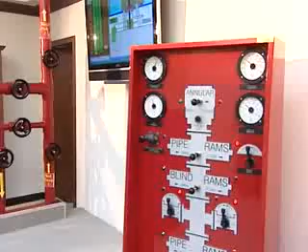Welcome to the ADC Simulator, where we make the effort to simulate well control situations which occur on the rig as realistically as possible. In the following few minutes, you will see an enactment of a well control operation and the complications that might arise during this operation.

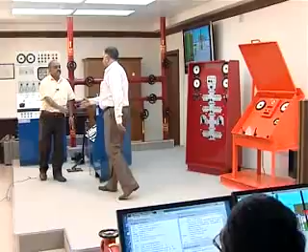Hello, boss. Hello, driller. How are you? Fine, thank you. Hope you had a good rest. Yeah, I'm excellent, in good shape.

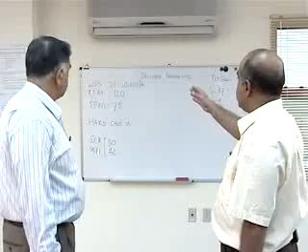Very good. So today we'll be drilling. Okay. And while drilling, these are the parameters you have to keep. Weight on bit will be 25 to 30,000 pounds. Okay. RPM 120. Okay. SPM will be 75. So before you start, driller, make sure all your lineup is okay. Okay. On the rig floor and also on the choke manifold. Send your assistant driller and make sure the lineup is okay.

Check your alarms, and we are entering the pay zone now. Right. So you have to be very careful. Okay. Make sure you set all your alarms. Okay. And if there is any drilling break, please make a flow check. Okay. And if it's flowing, then we will use the hard shut-in method. Sure, sure. Okay? Okay.

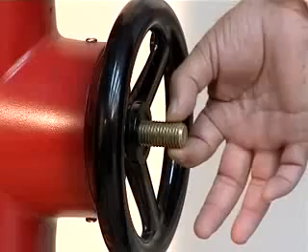I will check the standpipe manifold for correct lineup. Both mud pump number 2 and mud pump number 1 should be lined up. Standpipe number 1, the valve is in open position if the spindle is extended out, and if the valve is in closed position, the spindle will be inside. The valve going to standpipe number 2 is in closed position.

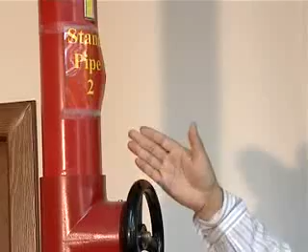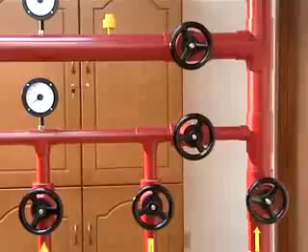This isolation valve in the middle is in open position. Both of these valves are leading to standpipe number 1, which is also in open position. The line coming out from mud pump number 1 is in open position. So both of the mud pumps, mud pump number 2 and mud pump number 1, are lined up to standpipe number 1. All valves on auxiliary lines should be in closed position. Closed, closed, closed, and closed.

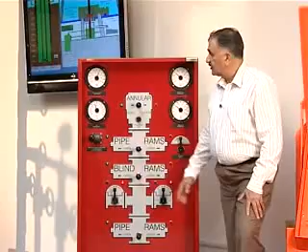Now I am checking the BOP remote panel. Accumulator pressure 3000 psi, air pressure 120 psi, manifold pressure 1500 psi, annular pressure 1500 psi. Green light indicates that the annular is in open position. Green light, upper pipe rams in open position. Green light, blind rams in open position.

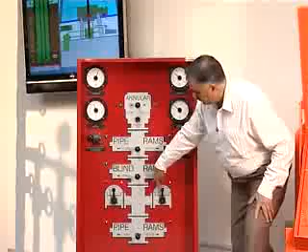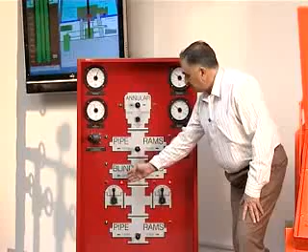Red light, kill line in closed position. Red light, choke line in closed position. Green light, lower pipe rams, which are the master pipe rams, are in open position. So all BOPs are in open position. Both kill line and choke line are in closed position.

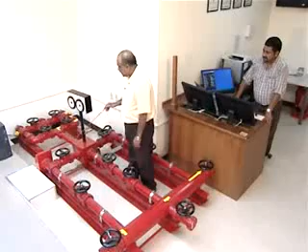As we will be using the hard shut-in method, this is the way we are going to line up the choke manifold. This is the line coming from the BOP and into the block of the choke manifold. From the block of the choke manifold, on this side we have the remote choke, which will be in the closed position, and on this side we have the manual choke, which is also in the closed position. The path the mud will take will be from the block through this open upstream valve, remote choke closed, valve downstream open, and out into the mud gas separator.

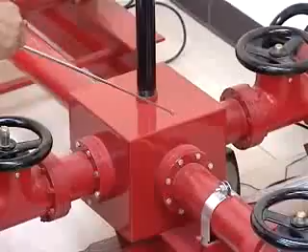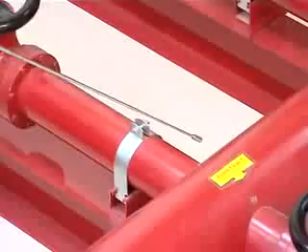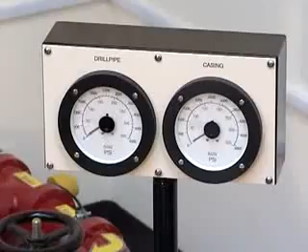From the block there is also the bypass line with two valves on this line, both of which are in closed position, which is connected to the buffer line through which it goes to the flare line. This valve upstream of the manual choke is in closed position, the manual choke closed position, the valve downstream of the manual choke also in closed position, and this line also joins the buffer line. These are the gauges mounted on the choke manifold, one for drill pipe pressure and one for casing pressure.

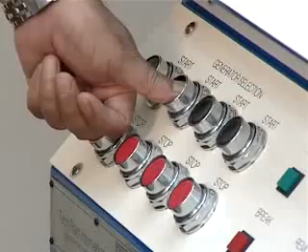To start the engines, press this button. To start the second engine, press this button. Put the mud pump 1 on, and before I go ahead to drill, I will take the slow circulation rate. Bring the mud pump to 30 strokes, and I will read the pressure from the remote choke panel. Slow circulation rate at 30 SPM, 650 psi.

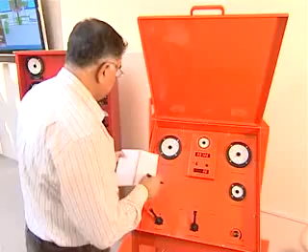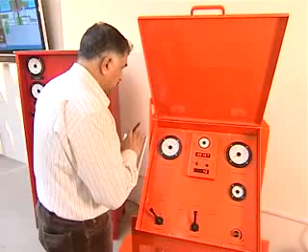I will bring the pump to 40 strokes. I will read the pressure from the remote choke panel. Slow circulation rate at 40 SPM, 1150 psi. After taking the slow circulation rate, I will bring the pump speed to 70 SPM, and then I will set the alarms.

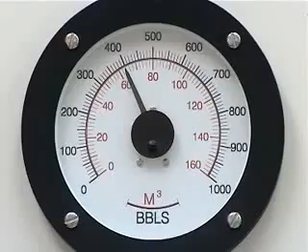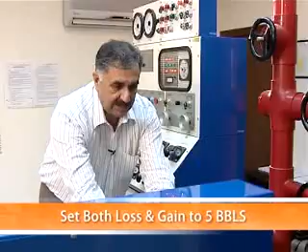Now I will set the pit loss and gain alarm. I will switch on the mud volume totalizers for the active system. Put the power on. Press this knob to the left and turn low adjust to the right until I see a red light. Similarly, press high set to the right and turn high adjust to the left until I see a red light.

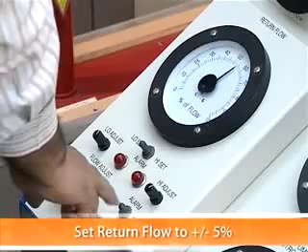Now I will set my flow line sensor for small increase or decrease in flow. So press this one to the left side and then rotate the low adjust until I hear an alarm. Then press to the right side and rotate high adjust until I hear an alarm. So now you leave it on. Make sure the alarm is in on position.

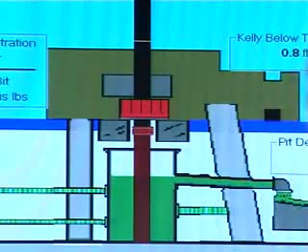I will lower the bit to bottom, and once the kelly drive bushings are sitting inside the rotary table, then I will start the rotary. Okay, I'll continue to lower down until I tag bottom.

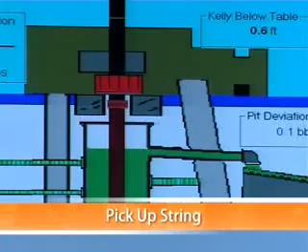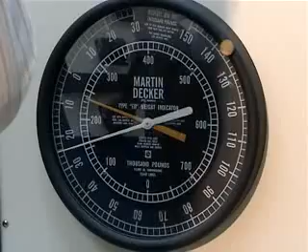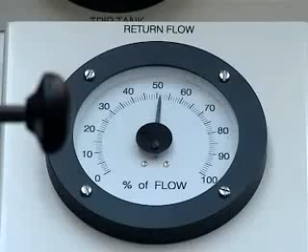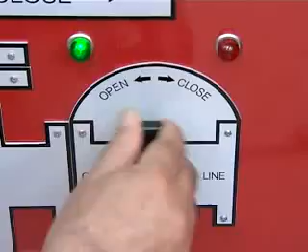I got a drilling break, stop the rotary, disengage the rotary clutch, and now I am picking up. Now I will shut the well in. And open the choke. The well is shut in. Tool pusher, come on rig floor. I have a kick.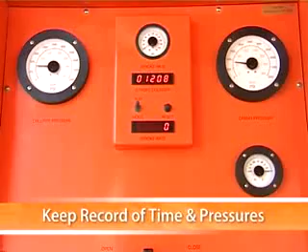Yes, driller, what happened? Well, I made a flow check on drilling break, and the well was flowing. So I shut it in with the upper pipe rams, and I've got shut-in drill pipe pressure 810 and shut-in casing pressure 900. And what is the gain? 4 barrels. Okay, what is the MAASP? 1600 psi. That's a very small kick. I think we can manage to kill it very easily.

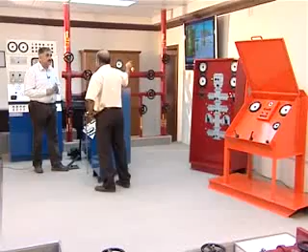So I will do one thing. I will go just round, make a quick check and come back. In the meantime, you keep monitoring the pressures to check for migration. Make sure that the pressure does not exceed the MAASP. And anyway, if it is going more than 200 psi than what it is now, please call me. Okay? Okay.

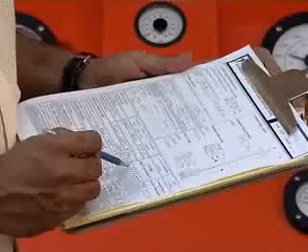Okay, the kill sheet is now ready. The MAASP is going to be 1690 psi. We will be pumping at 30 SPM, and the strokes to displace the string volume is 2326. The open hole volume is 1719 strokes. The total annulus volume or the bottoms up is 6513 strokes, and the total volume to kill the well is 8838 strokes.

The kill mud we will use is 13.2 ppg, and we have the pressure schedule here, the pressure drop for every 100 strokes of kill mud pumped, and these are the graphs for this schedule.

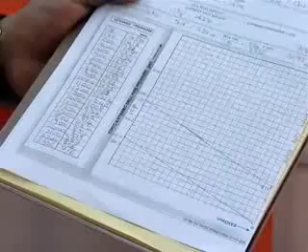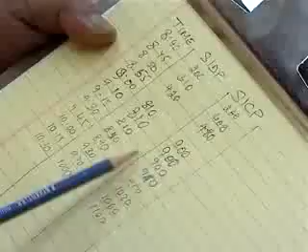The stabilized pressure at 9 o'clock was 810 psi on the drill pipe and 900 psi on the casing. It stayed like that till 9:15, and after that we are seeing some gas migration, and the pressure at this time at 10:30 is 1000 psi on the drill pipe and 1100 on the casing. That means there has been an increase of about 200 psi. As we have had an increase of 200 psi due to gas migration, the first thing that we will do now is to bleed off this excess 200 psi to restore the bottom hole pressure to its original value.

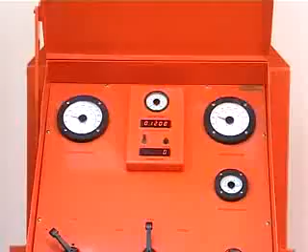To reduce the drill pipe pressure by 200, we have to be looking at the casing pressure gauge, because there is a time delay of 1 second for every 1000 feet of the well depth. So now I am going to reduce the pressure on the casing side by about 200 psi, and then we will see a corresponding drop on the drill pipe gauge after a few seconds. The drill pipe pressure is now 850 psi. That is about 40 psi more than when we initially shut in the well. So we can now start killing the well.

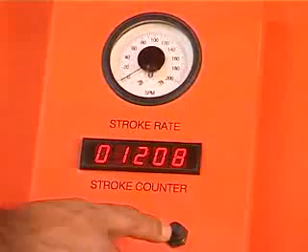Driller, the kill mud is ready, so have the derrick man line up the kill mud. We will be killing this well with 30 SPM using the wait and weight method. So I want you to increase the pump in stages, 5, 10, 15, all the way to 30 as I give you the signal. First of all, we will reset the stroke counter. Okay, driller, give me 5 strokes please. We will bring up the pump to the kill speed in stages, holding the casing pressure constant by opening the choke as necessary.

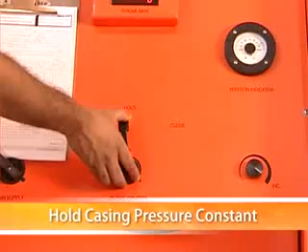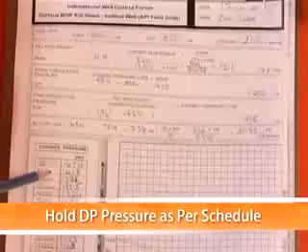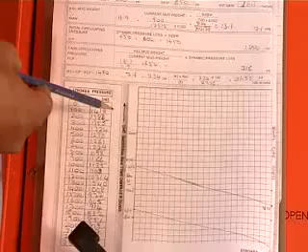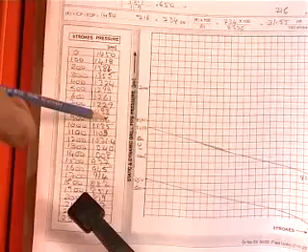Now that we have the pump rate up to kill rate speed, we will now follow the schedule as we have calculated in the kill sheet. We have now pumped 213 strokes. We have a pressure of about 1400 psi, and we need to keep, as per the schedule, 1380 psi, which means we are 20 psi overbalance, which means everything is going well. We have now pumped 904 strokes. The pressure is about 1200 psi. As per our graph, we should have 1160 psi. So we have now 40 psi overbalance, which means still everything is okay.

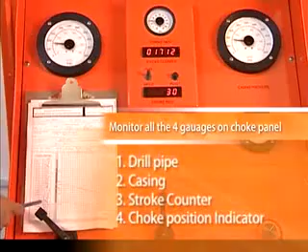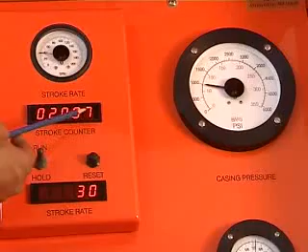We have pumped now about 1700 strokes. On the drill pipe side, we have about 950 psi. As per our schedule, we should be having 915. So we are still overbalanced by about 35 psi, which means everything is still okay. The casing pressure has been rising steadily as the gas expands as it comes up the hole. Since we have already pumped 2000 strokes, we do not worry about the MAASP anymore because the influx is already inside the casing.

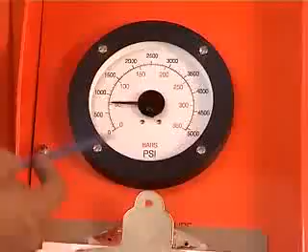We have now pumped 2367 strokes, which means we have displaced the drill string with the kill mud. We are now at the final circulating pressure, which according to our calculation should be 716, and the gauge is showing 750, which means we are 35 psi overbalance and everything is okay. We have now shut down the pump after pumping the string volume to check for pressures. The pressure on the drill pipe side is 0. That means the well is dead from the string side.

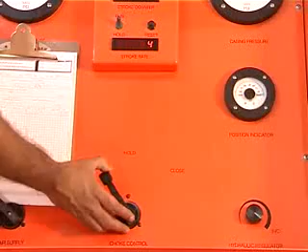Okay, driller, give me 5 strokes please. We will bring up the pump to the kill speed in stages, holding the casing pressure constant by opening the choke as necessary.

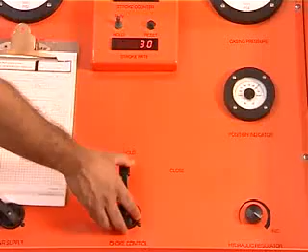Oh, the pressure seems to be going up on the casing side. The casing pressure has climbed up from 1100 to about 1400. That's 300 psi more than normal. The drill pipe pressure also has climbed up by about 300 psi. Okay, driller, put the pump off. Totally off.

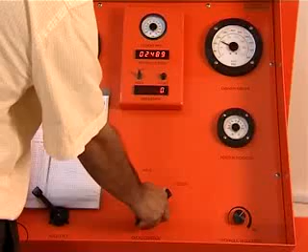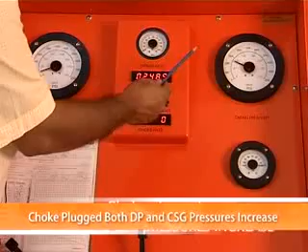We noticed that first the casing pressure started to go up, and after some time the drill pipe pressure also started to go up. Looks like we are having a plugged choke. So I asked the driller to shut down the pump immediately, and I closed the choke as well.

Now the drill pipe pressure should have been 0 because we have already pumped the kill mud down the drill string, but it is showing about 300 psi, which means this is some trapped pressure. So the next step would be to bleed off this trapped pressure and repair the choke or change the choke.

We have just repaired the remote choke and we are going to start the kill operation again. We will again come back to kill rate speed by holding the casing pressure constant. Driller, 5 strokes please. Ten please. Okay, we are back to the killing operation. Drill pipe pressure is now at 750. Casing pressure still at 1100. Everything seems to be okay.

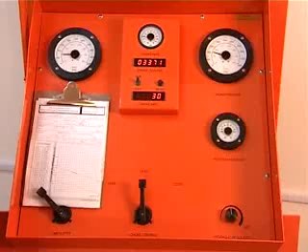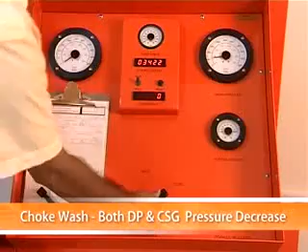Okay, I am seeing both the pressures coming down now. So I am closing the choke. In spite of my closing the choke, there is no reaction. Seems like there is a choke washout. Okay, driller, put off the pump. Since the choke is washed out, I have to close the HCR.

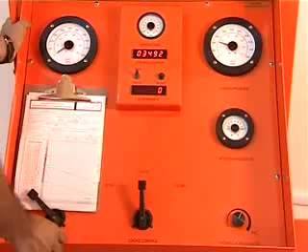Okay, we have repaired the remote choke now and we're going to start the kill operation again. We will bring up this pump to speed holding the casing pressure constant. Driller, give me 5 strokes please. 15. We are back to kill pump rate and the drill pipe pressure is showing 750 psi. Pressure is 750. Seems okay.

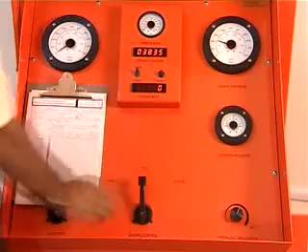Seems like the pump is down. Driller, the pump is off. Call the electrician and let's get it fixed again. Driller, since pump number 1 cannot be started, let's start with pump number 2.

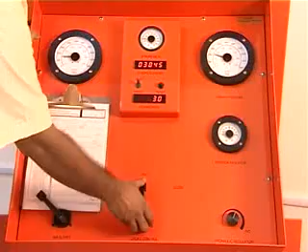We have lined up standpipe number 2 with pump number 2 and we are going to start the kill operation again. We will bring the pump up to speed holding casing pressure constant. Driller, give me 5 please. 15. 30. We have now pumped 3,900 strokes. We are still holding the FCP about 800. Casing pressure is showing about 1000 psi.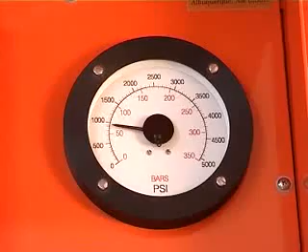The drill pipe pressure has shot up suddenly. There is no change in the casing pressure. Seems like the bit nozzle is plugged. Driller, let's shut down the operation. Reduce by 5 strokes. Shutting down the well keeping casing pressure constant. Okay, put the pump off completely.

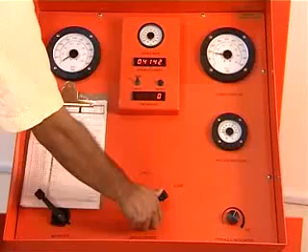Driller, looks like the bit nozzle was plugged. The drill pipe pressure went up, but there was no change in the casing pressure. So there's not much we can do now. Let's bring the pump back up to speed, holding casing pressure constant, and whatever we see on the drill pipe will be our final circulating pressure now.

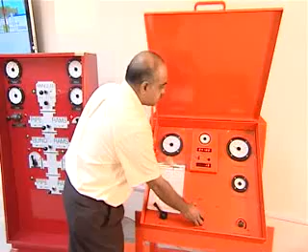Driller, give me 5 please. Give me 10. Give me 15. Give me 20. Give me 30. We are circulating at 1500 psi because of the plugged nozzle. The gas is also coming to surface. We can hear the sound of the gas.

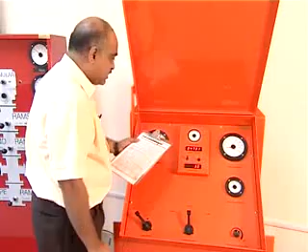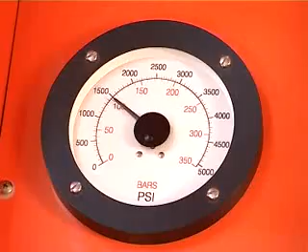The calculated bottoms up strokes was 4794 and we are now almost there with 4756. We can still hear the gas coming out, and as the gas comes out we can see the casing pressure has gone down. Drill pipe pressure is still at 1500 psi, so everything seems to be okay. The drill pipe pressure is still at 1500 psi and all the gas seems to be out. There is no more sound of gas coming.

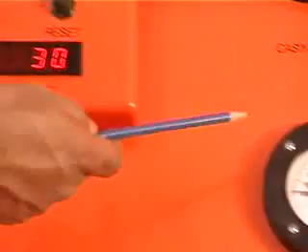We have pumped 9,225 strokes. Casing pressure is almost zero. The choke is fully open. Drill pipe pressure is still 1500 psi. It is now time to shut down and check if there are any pressures left in the well.

Driller, we will start to shut down the killing operation now. So please reduce the pump strokes 5 by 5. Okay. Okay. Okay. Okay. Put the pump off, please.

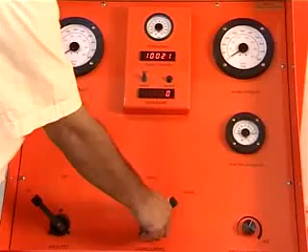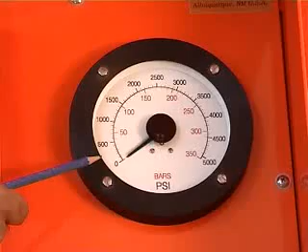We have pumped about 10,000 strokes now. Drill pipe pressure is showing 0. Casing pressure is also showing 0. It looks like the well is dead. We will now flow check through the choke manifold. The choke is now wide open and there is no more flow from the well. The well is dead. We will now open the BOPs and go back to drilling.

Driller, great job. With all these complications, we managed to kill the well safely. Thank you very much.

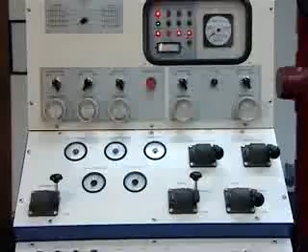I thank you for taking the time to watch this video, and I hope that your understanding of well killing operation will become a bit clearer.